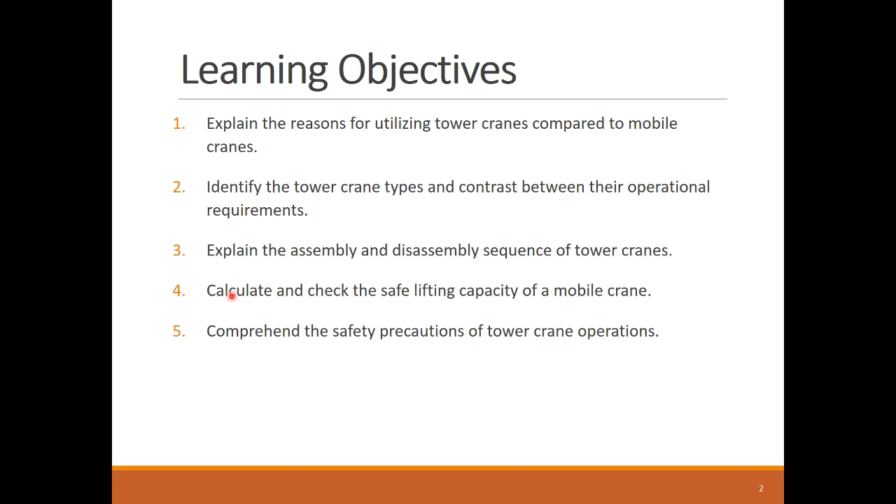We will cover 5 learning objectives in this lesson. Similar to mobile cranes, we'll learn about the types of tower cranes, their assembly process, the calculation of their safe lift capacities, and the disasters that can happen if tower crane safety precautions are not followed.

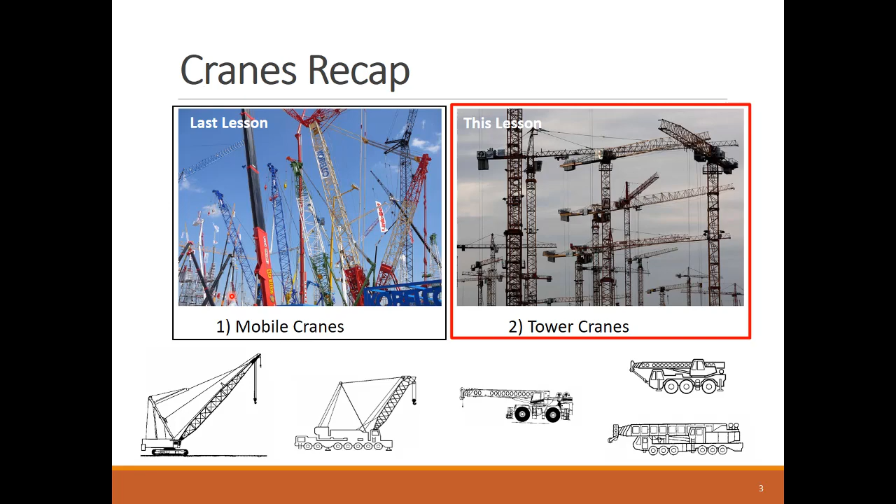Last lesson, we learned about some cool mobile cranes like the all-terrain, rough terrain, truck-mounted, and crawler cranes. It's good to check the previous lesson on mobile cranes, as there are a lot of concepts that we'll recycle and examine again when we learn about tower cranes.

Tower cranes are huge temporary structures on construction sites to help lift many heavy loads in a very concentrated area, like a high-rise building or a tall bridge pier.

A tower crane lifts and moves the load using a trolley that is operated by a cable hoisting system on the crane jib.

The weight of the jib and the hoisted load is countered by the counterweight on the other side of the tower mast, which carries everything we just mentioned.

The tower is controlled by a cabin at the point where the mast and the jib meet.

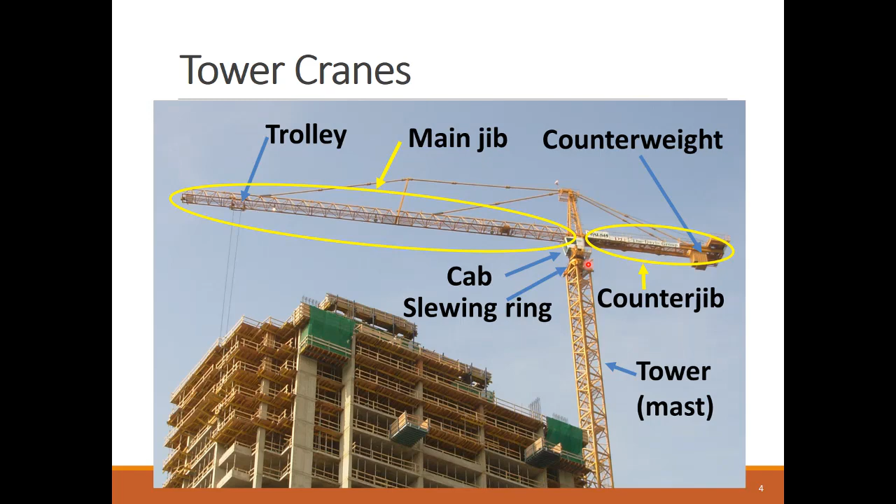All cranes have 3 main movements: hoisting the hook block with the load up and down, trolleying the load closer and farther from the tower mast along the jib, and slewing or rotating the jib around the tower mast. Some smaller tower cranes can travel along a path close to a longitudinal construction operation.

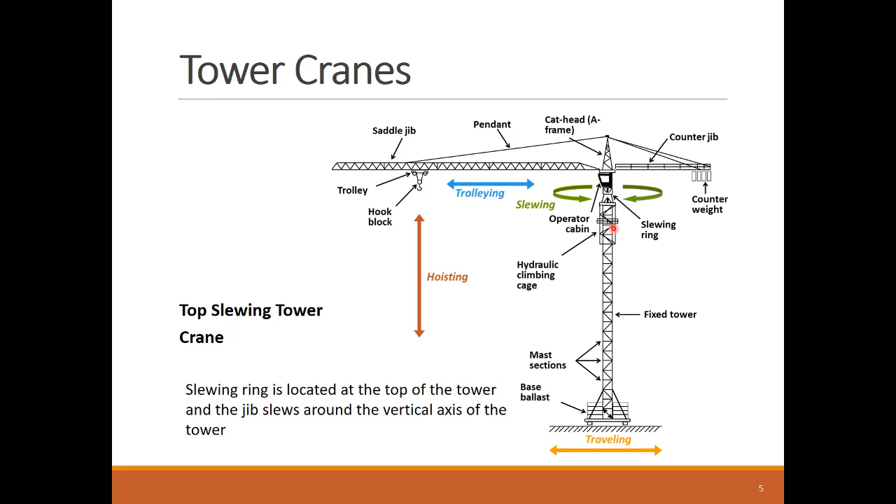The shown diagram is for a tower crane type called top slewing, because the rotation ring is located at the top of the tower mast that stays fixed and does not rotate.

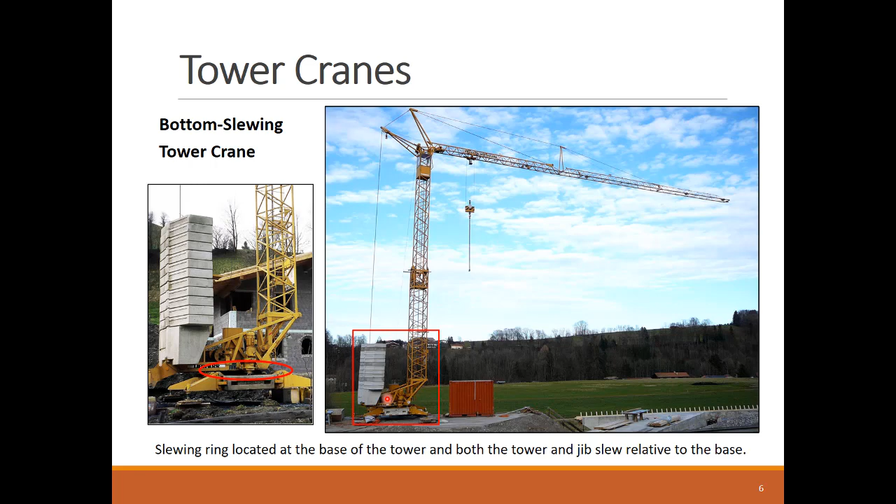Some lighter tower cranes can be bottom slewing tower cranes, where the slewing ring is at the base of the tower mast. In this case, the whole crane with its mast and jib swing.

The tower jib can come in 3 main configurations. The saddle jib, also known as a hammerhead, are the most common tower cranes as they provide multiple benefits.

Saddle jib cranes are generally cheaper to rent, provide quicker operation, require lower power, and are easier to erect and dismantle. They also require minimal support on the constructed buildings, as a saddle tower crane can support itself for up to 100 feet height. Flat top or topless cranes started gaining popularity in the early 2000s, and they are comparably lighter than the saddle jib.

The luffing jib cranes provide a great solution to tight construction sites, where the front jib can be lifted using a strong rear pendant and cables.

You will most likely see luffing cranes in the skyline of large cities like New York, Chicago, and Seattle.

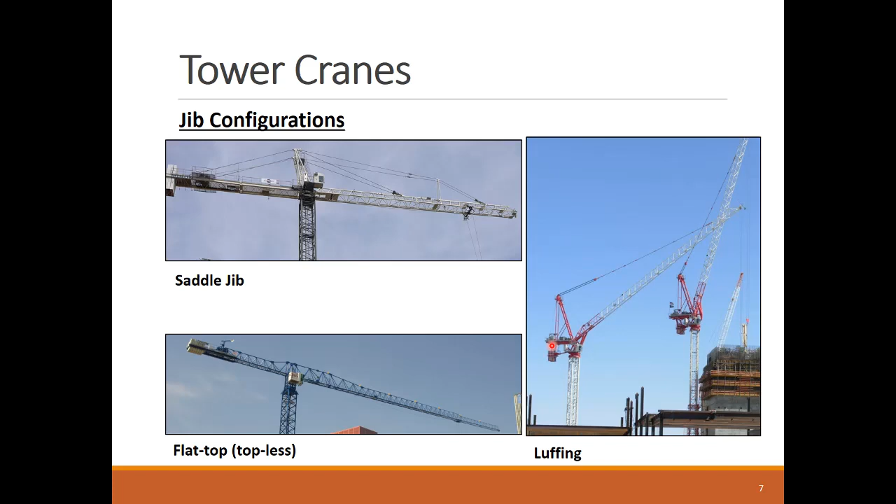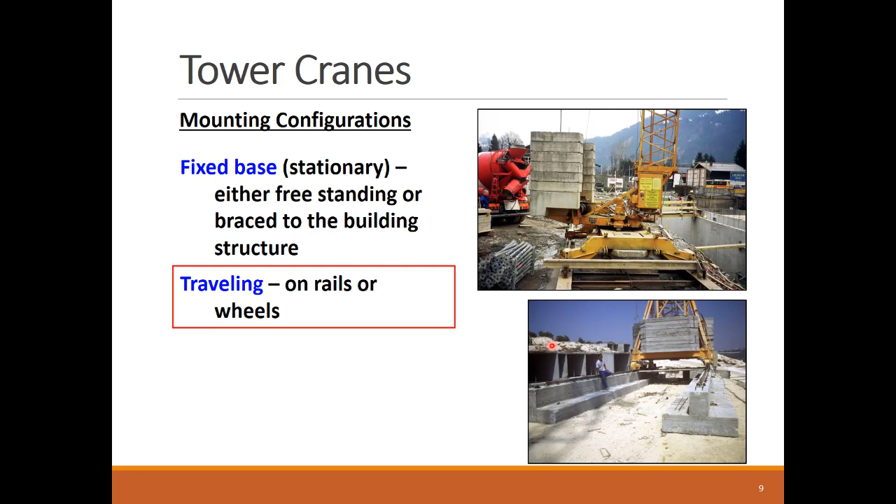As we mentioned before, the base of the tower crane can be fixed to its own foundation base, or it can travel on rails or wheels supported by longitudinal footings.

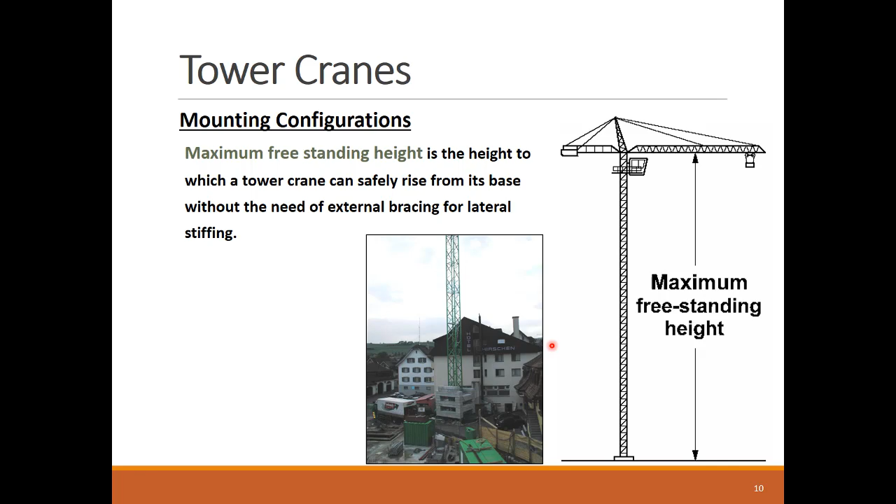Every crane has its own maximum freestanding height, where it has the structural capacity to hold itself and the lifted load without the need for any support except for its base.

Sometimes there is a need for a tower crane to reach beyond its maximum freestanding height. In such a case, the tower can reach higher elevations by bracing it to the building that is being constructed.

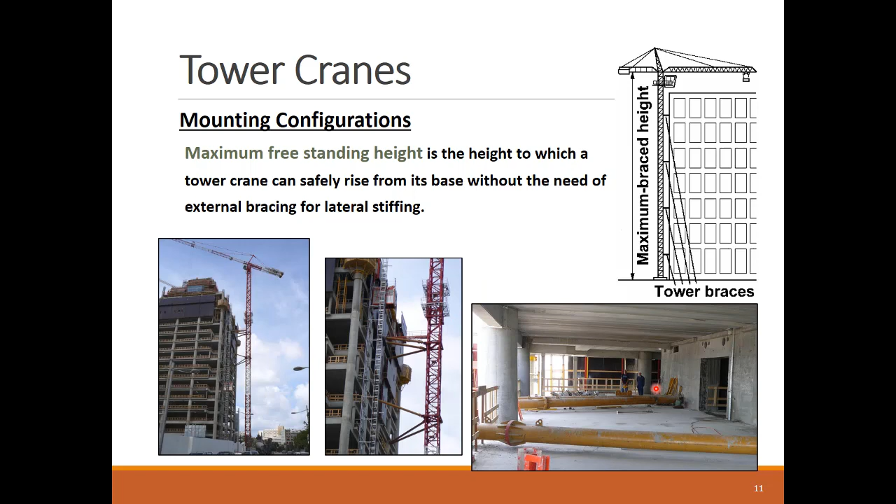This requires careful structural analysis and design of these braces and their connection to the building. The assembly of the tower crane is a major mobilization activity that requires considerable time and budget.

Let's see this video of the erection of a climbing tower crane.

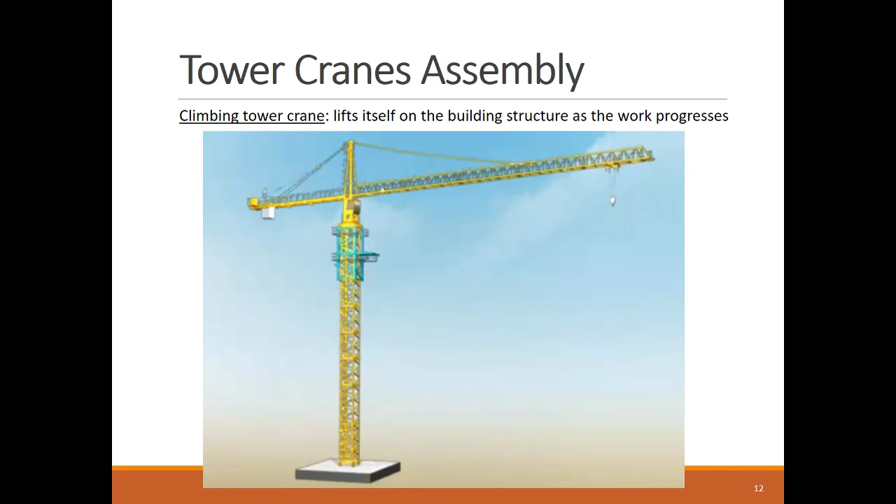Let's step back a little and reflect on the situations where we need to use the tower crane, not a mobile crane. First, tower cranes are great for projects with very tight footprints and don't have enough space for setting up a crane and its outriggers.

Second, tower cranes virtually have no limit on the lift height. If strategically placed, tower cranes don't really need to be moved, as they can come with great coverage of the site.

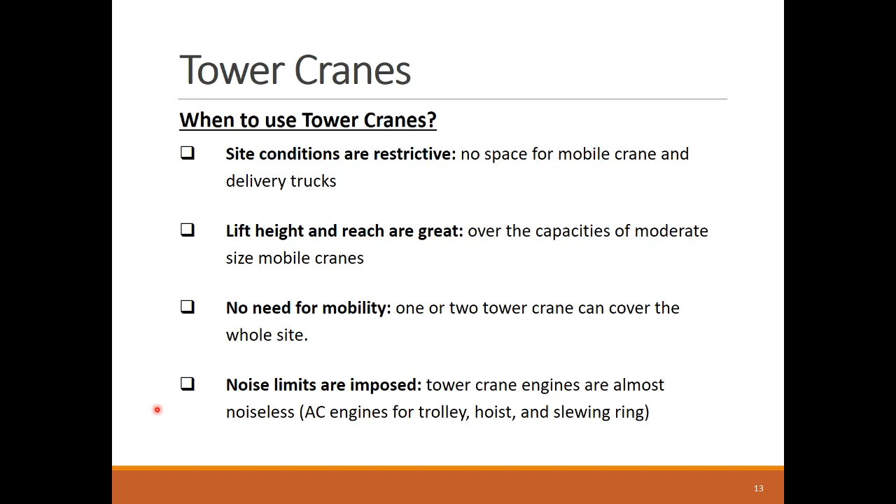Finally, tower cranes produce much less noise due to their AC, alternating current, engines.

It's clear now that the location and layout of the tower crane is very critical and needs great planning and attention. The good news is that there are not many options when it comes to tower cranes. You are limited to one or two cranes available from the contractor fleet or from an equipment renting company. As such, the location is the main decision that needs to be made. This layout decision requires the following steps.

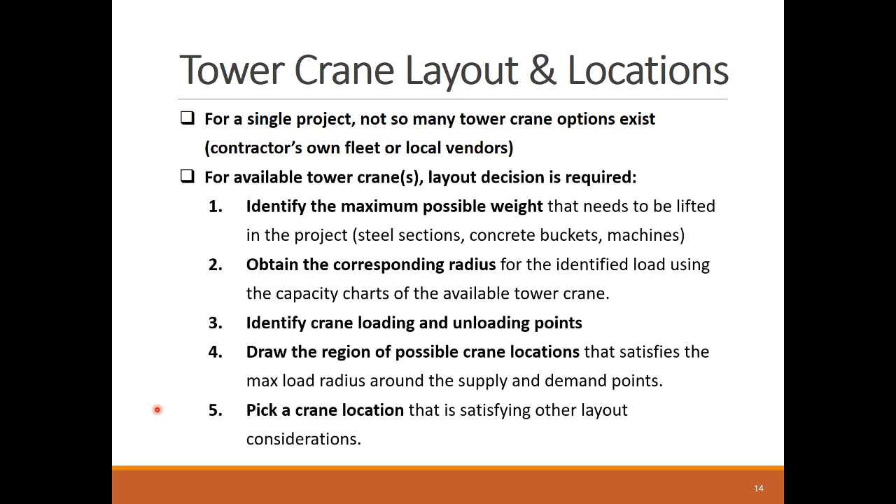First, the contractor identifies the heaviest loads that will be lifted by the crane, be it a concrete bucket, structural element, structural steel elements, or heavy mechanical, electrical, or plumbing equipment. As we did with mobile cranes, we need to include the weight of the slings and any platforms or containers to lift the load. A working margin factor is used to increase the lift load to account for non-ideal loading cases like wind and dynamic loading.

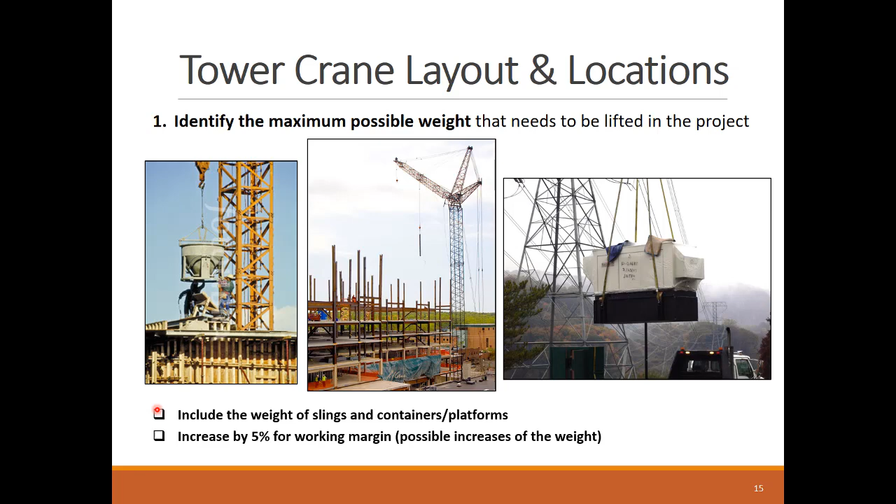Based on this maximum load, we pick from the crane manufacturer manuals the longest crane jib that can support this maximum load.

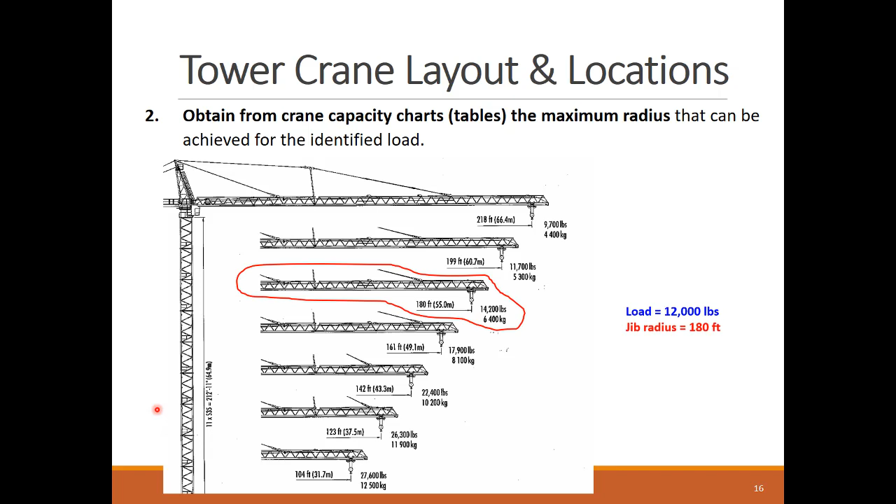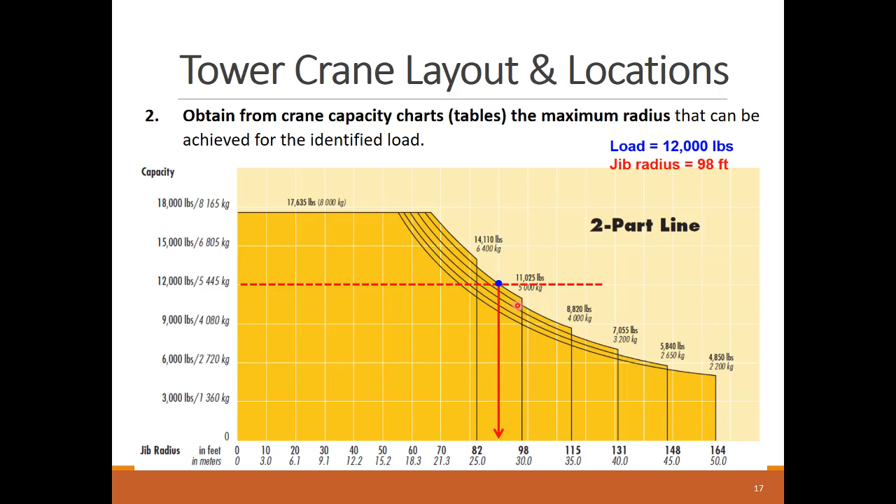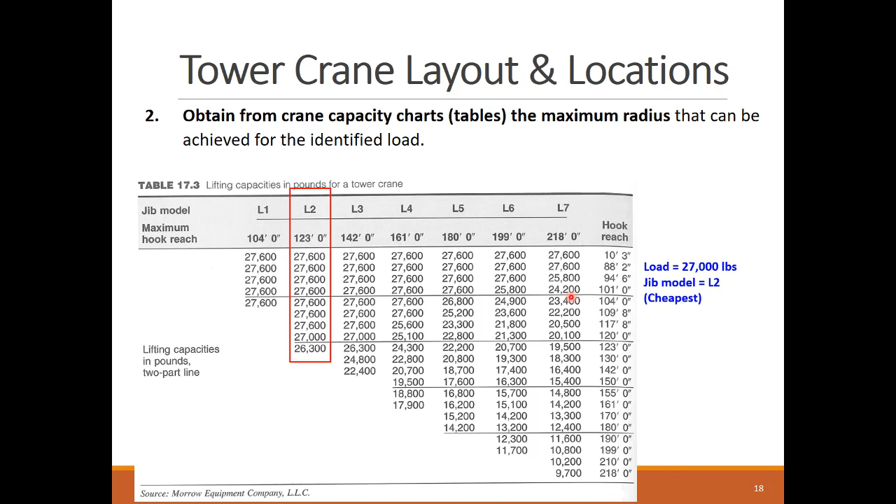The crane capacity tables or sheets differentiate between two trolley system types: the two-part line trolley hoisting system and the four-part line system. The four-part line system utilizes an extra pulley to provide four cross sections of cables to carry the load instead of two.

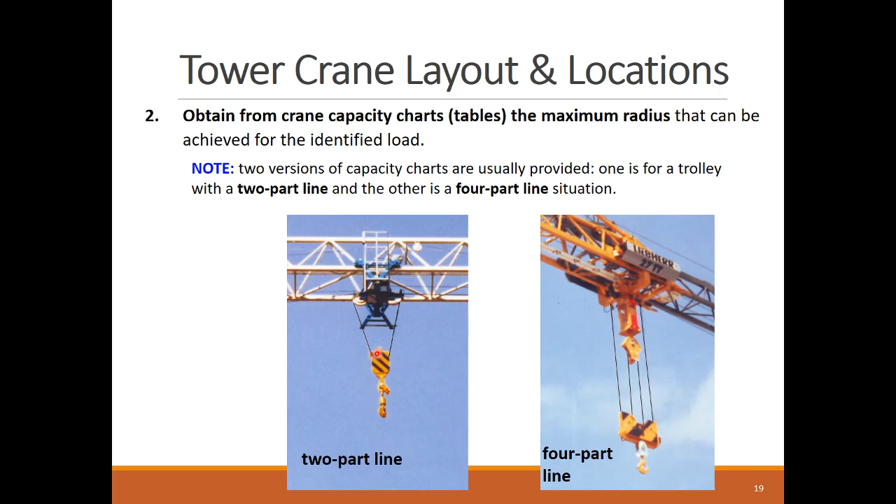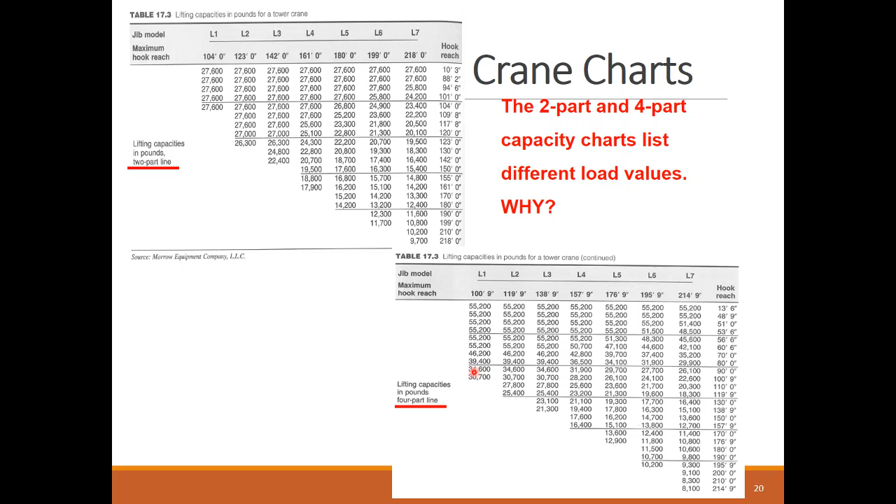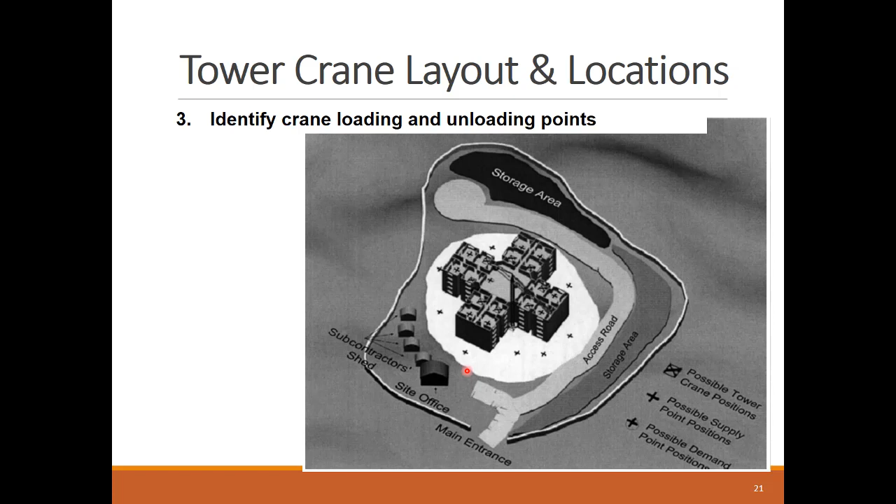The third step in determining the tower crane location is to identify the crane loading and unloading points. This is done as part of the site logistics planning, not just focused on the tower crane operations. The site logistics plan determines the loading point or points. What about the unloading point?

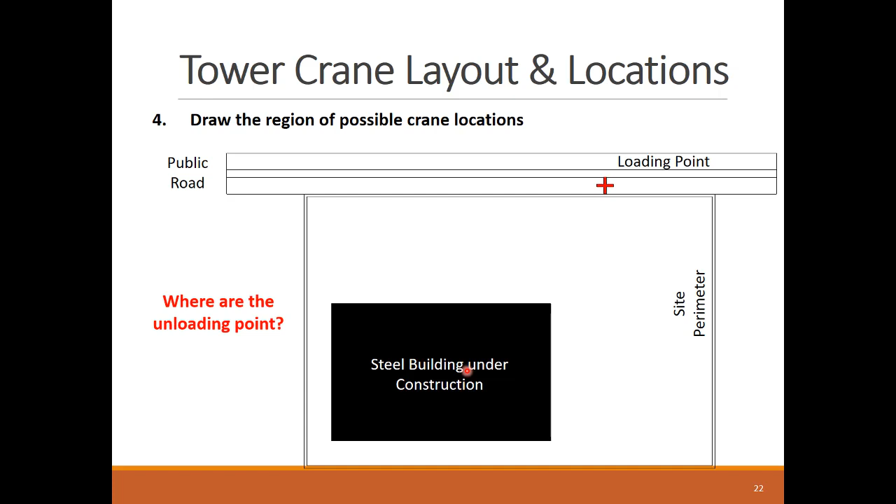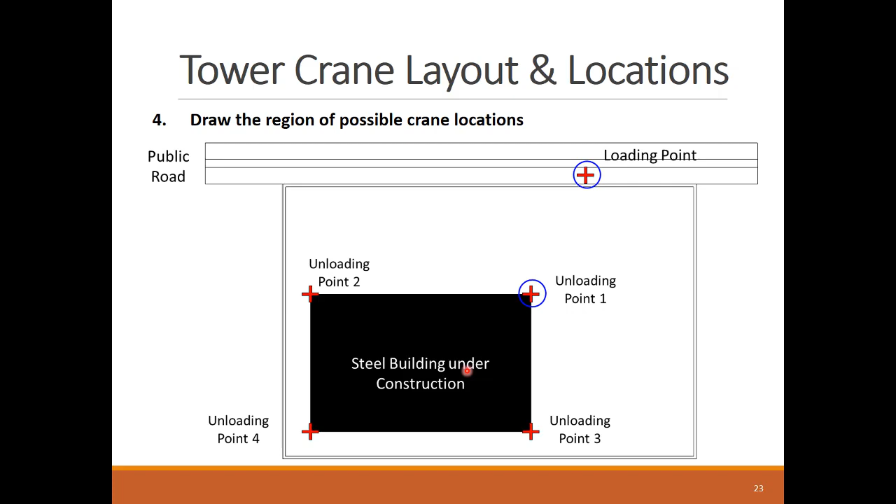To provide more flexibility in future crane operations, we can assume that every point in the whole building will be an unloading point. But we only need to examine the extreme outer points as the extreme cases of unloading. We will examine every pair of loading and unloading points and pin down the crane location that can serve both points. Let's start with the loading point and the first unloading point.

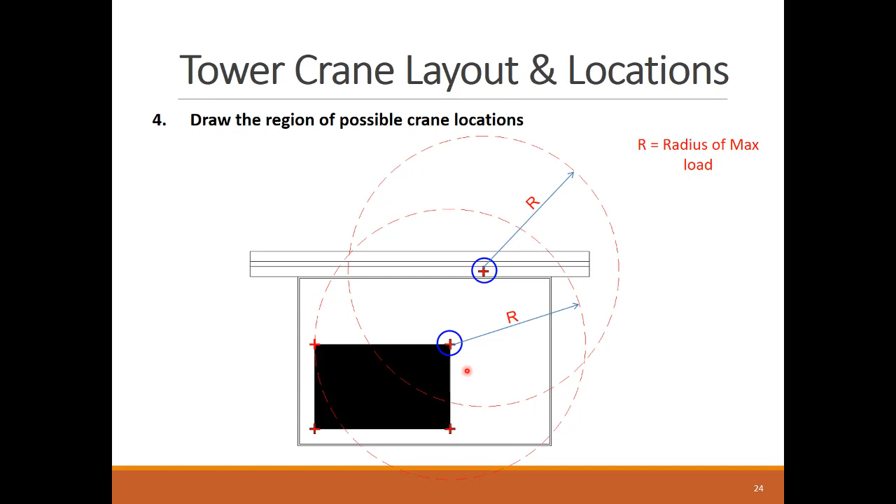We draw a circle around each of the considered points, with the radius equal to the maximum crane hook reach that we identified from the crane capacity chart. For these two points, the crane can be placed in the overlap zone between these two reach circles and the site footprints. Any point in this hatched zone is a feasible location to place the tower crane for this loading and unloading pair of points.

We will repeat this same process for a different pair of points. Draw the reach circle around the second unloading point, and we see our feasible crane base spots are getting fewer. Considering the third unloading point, we end up with an even smaller feasible zone for the crane, and finally the last unloading point, we end up with this small feasible zone to set up the tower crane.

Of course, it's better to consider the face line of the building edge to place the tower crane, in case it needs to be braced to the building.

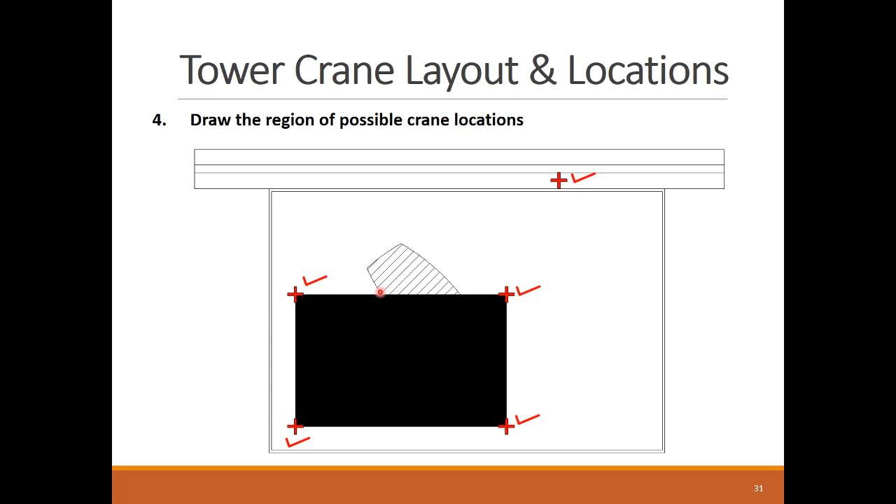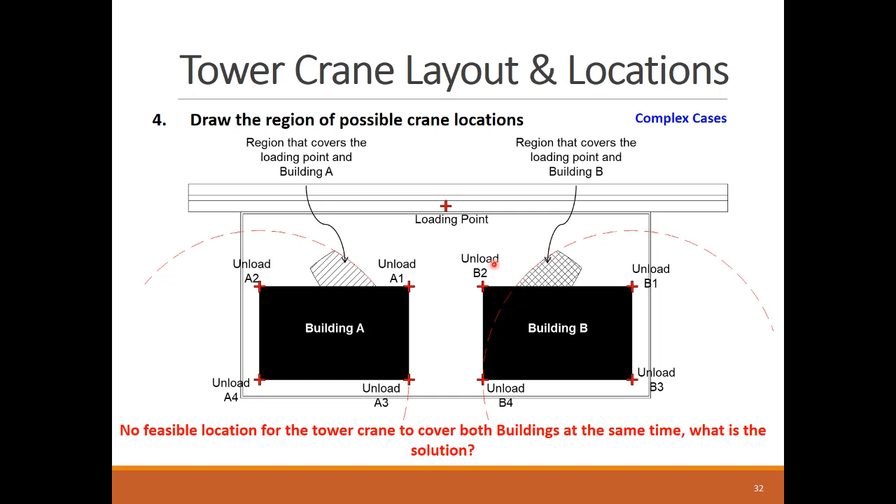This other example shows the case where there was not a single feasible crane point that could cover the whole project. In this case, we will need 2 tower cranes, each serving a building in this project.

Some complex and large projects require multiple tower cranes to cover the entire building footprint. There can be some redundant overlaps between the tower cranes, where a single point can be covered and served by more than one tower crane.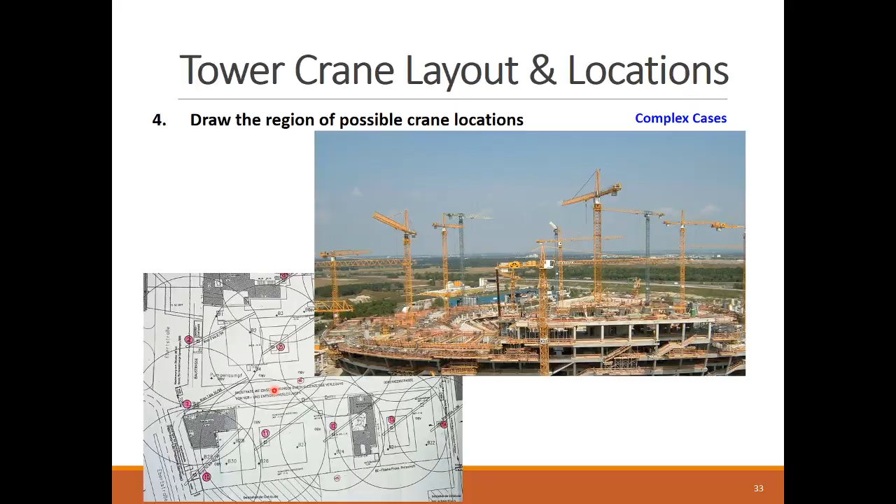Let's work on this exercise to check if the provided tower crane can lift the heaviest load in this project. The crane already comes equipped with an L7 jib and a 4-part hoist line. The maximum reach is 90 feet, and the heaviest load is 26,000 pounds.

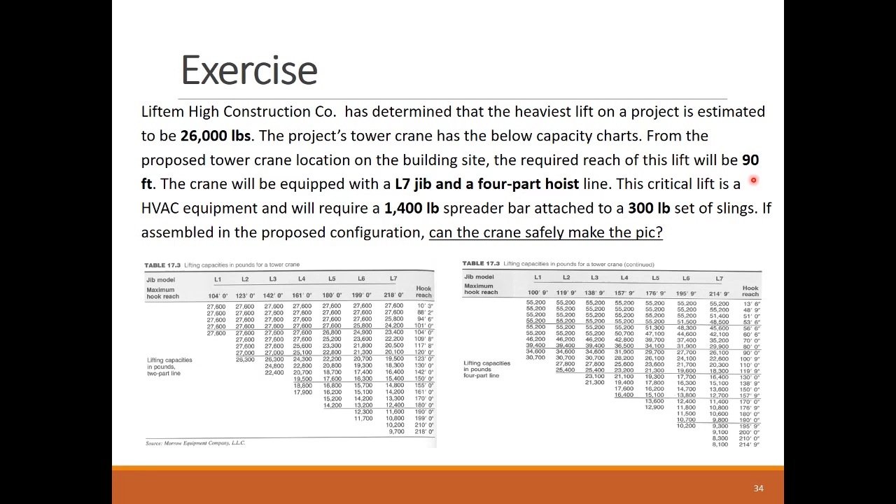The load will require a spreader bar and a sling that come with their own additional weights. We focus on the 4-part line capacity table and locate the cell that corresponds to the equipped crane jib and the hook reach. This means that the gross crane capacity will be 26,100 pounds.

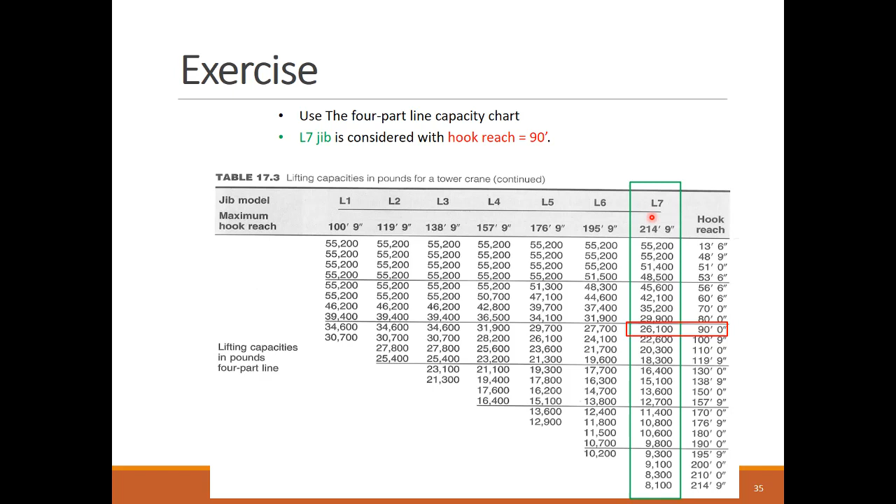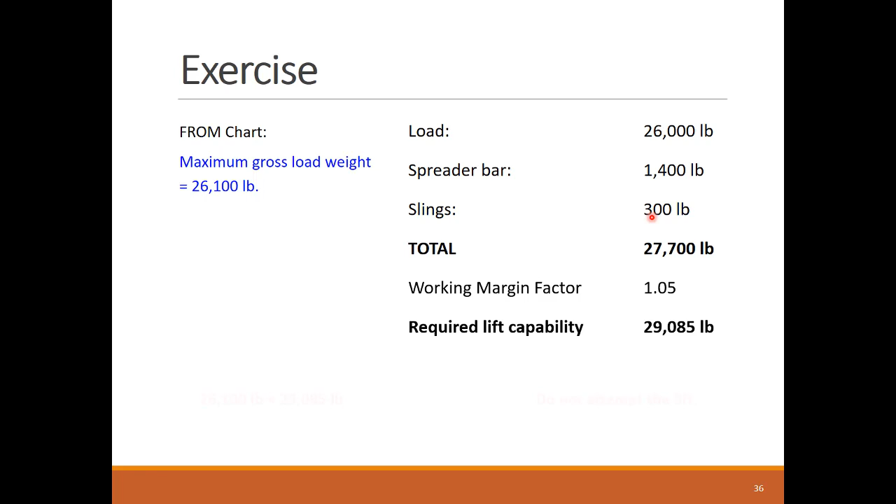Now we need to compare the gross load to the gross capacity. We add all the weights of the lift and its accessories to be 27,700 pounds. Then we add a working safety margin of 5%, which results in a gross load of around 29,000 pounds. This is much more than the crane capacity, and it's recommended to either change the crane configuration or the site logistics plan.

The construction speed in high-rise building construction is very dependent on the duty cycle of the crane, which is the time the crane takes to lift a load from the pickup point to the drop-off point and return for the next load.

This duty cycle includes repeating the main crane movements shown here: hoisting, trolleying, and slewing. Also, the time includes the tasks of attaching and detaching the load from the crane hook.

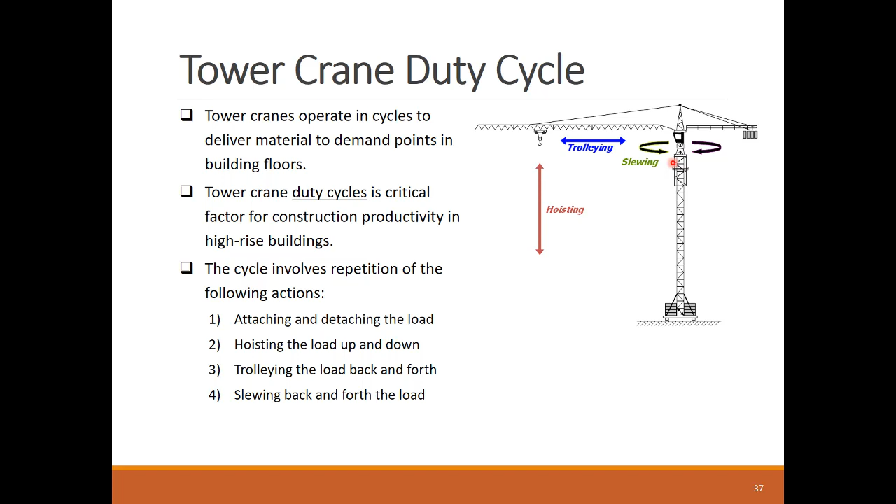The crane duty cycle is calculated based on the distances between the pickup and drop-off points and the speeds of the mechanical movement of the crane. Here are some suggested speeds for the slewing, in rounds per minute, and trolleying, in feet per minute.

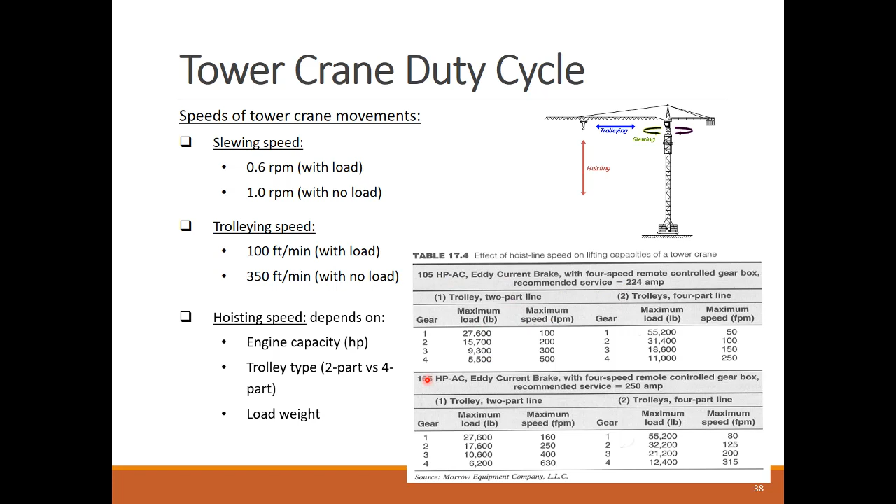The hoisting speed is dependent on the hoisting system type, whether it is a 2-part or 4-part line system. It also depends on the horsepower of the crane's AC engine. This table shows the speeds for a crane that can be equipped with 2 engine sizes and 2 hoisting system types.

We can see that the stronger engine provides higher hoisting speed for the same hoisting system.

For the same engine horsepower, the 4-part line hoisting is 2 times slower than the 2-part line hoisting. It takes double the time for the hoist line to go through the additional pulley that exists in the 4-part hoisting.

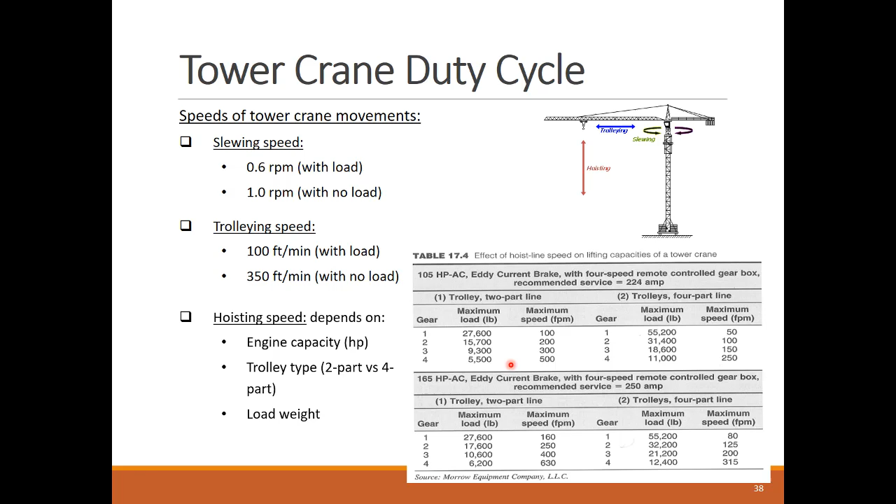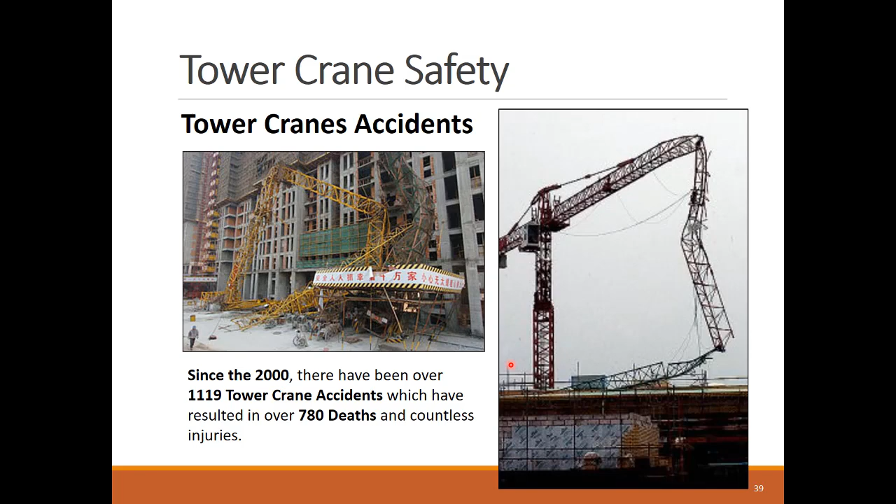The last part we will cover here is the safety of tower cranes, which, if not seriously considered, can result in disasters that are not limited to only the construction site. This is just an example of statistics that show the number of tower crane accidents and their fatalities worldwide.

When a tower crane fails, it threatens the properties and human life around the site, as we can see in these photos.

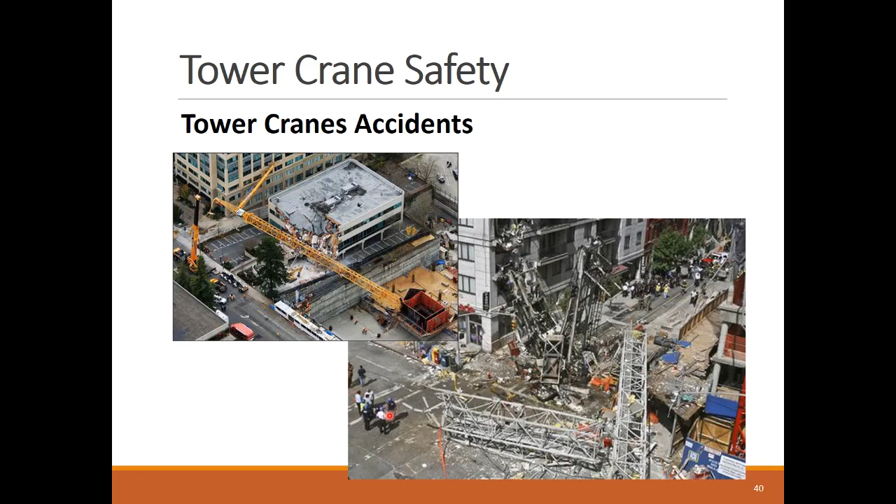Almost a quarter of the accidents happen from strong winds and storms that hit construction sites with tower cranes that are not well braced or well sized for the local climate.

More than a quarter of the accidents happen during the very vulnerable time of assembling the crane or during its climbing process. As we have seen in the animation video, the tower crane is in its weakest state when it is being assembled or raised.